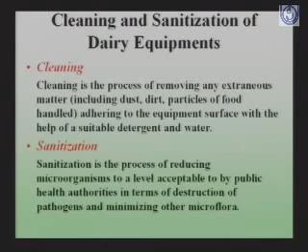Sanitization, on the other hand, is the process of reducing the microorganisms to a level which is acceptable to the public health authorities, in terms of destruction of pathogens and minimizing the other microflora which is there on the surface of the equipment.

First we will be discussing the detergents which are used for cleaning the equipment, and then we will be discussing the sanitizers. So first, the selection of detergents. For proper cleaning of the equipment, the detergent should be of appropriate type. It should not be irritating to the person who is cleaning the equipment. At the same time, it should not be corrosive to the surface of the equipment which is being cleaned.

So for an appropriate type of detergent, there are certain criteria which should be followed. First is the type of soil present on the surface of the equipment. Number 2 is the manner in which the soil is formed, whether it has been formed by processing the milk or whether the milk has been heated, and if heated, at what temperature, what was the pH. All these things will decide the manner in which the soil is formed.

The third criterion is the chemical composition of the water supply, what type of water is being used for the processing and for the cleaning of the equipment. Fourth is the nature of the food being processed or the food processing steps, whether you are processing liquid milk or manufacturing a product. So all depends on the nature of processing steps.

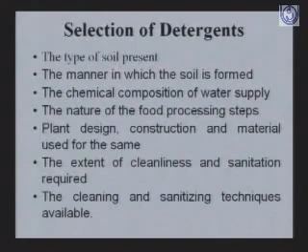Then plant design, construction and the material used for the same. If tin material is there, a different type of detergent will be required. If it is aluminium, then a different type of detergent will be needed. Then the extent of cleanliness and sanitation which is required. Then the cleaning and sanitizing techniques which are available in the plant. So these are some of the criteria.

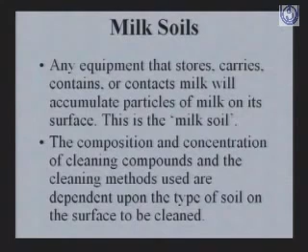Before discussing the detergents, it is important to know what milk soil is. Any equipment that stores, carries, contains or contacts milk will accumulate particles of milk on its surface. This is called milk soil. The composition and concentration of cleaning compounds and the cleaning methods used depend on the type of soil on the surface to be cleaned.

Then the chemical composition of typical milk soil. Just for example, the constituents are given: the cold milk soil, what type of composition it has got; hot milk soil, whether from a scraped surface heater or a tubular heater; and then the milk stones.

In the case of cold milk soil, the concentration of lactose is about 38% in the soil, fat is about 30%, protein about 26 or 27%, and the ash content is about 5%, or 5.3 exactly. In hot milk soil, lactose is only in traces. On the other hand, there is more fat, about 48 or 50%, and protein, about 40 or 41%, and the ash content is also higher, about 12%. This is in the scraped surface heater.

If the milk is being heated by a tubular heater, then the lactose will be in traces, the fat will be about 22 to 23%, protein about 30%, but the major proportion will be minerals, indicated by the ash content, which is about 46 to 47%.

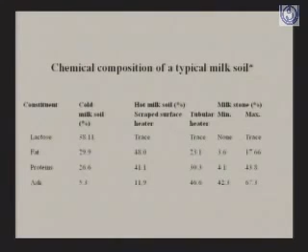Then the fat content is about 3.6% to about 18%. The protein content is about 4 to 43 or 44%. But ash content again is very high, which may range from 40 to 60 or 67 or 70%.

Then these components, how easily or how difficult they can be removed from the surface of the equipment. Sugar, which is soluble in water, is very easy to remove. The change induced by heating the soil surface is caramelization, and it is more difficult to clean when it becomes caramelized. Then in case of fat, it is water insoluble but soluble in alkali, and it is difficult to remove. Due to heating, there is polymerization, and this polymerized fat is more difficult to clean.

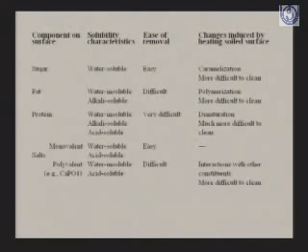Then protein is water insoluble, but soluble in alkali as well as in acid, very difficult to remove, and there is denaturation in the heated milk, much more difficult to clean the heated soil. Then the ash means the minerals. Monovalent minerals are water soluble, acid soluble, and easy to remove, but the polyvalent like calcium, magnesium, etc., form insoluble salts with phosphate, calcium phosphate or magnesium phosphate, and they are water insoluble but soluble in acid.

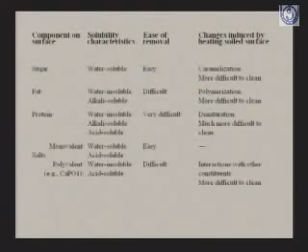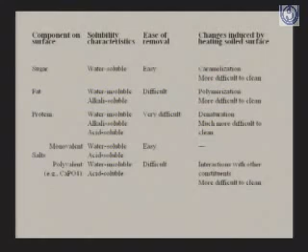They are difficult to remove, and during heating they interact with other constituents like protein, and it becomes more difficult to remove these stones which have been formed by the interaction of minerals with protein. Then the second important thing: one is the type of soil, second is quality of water. It affects the cleaning.

With the water, two problems may be there. One is the suspended matter. Water may not be pure, it may contain suspended matter. These must be kept to a minimum to avoid deposits on clean equipment surfaces, because water, instead of cleaning the surface, will accumulate these impurities on the surface of the equipment. So suspended matter or particles should be minimum or absent in the water used for cleaning. Second problem with water is its hardness.

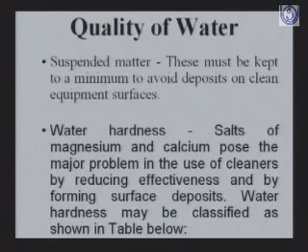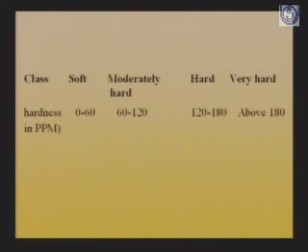The salts of magnesium and calcium pose the major problem in the use of cleaners by reducing effectiveness and by forming surface deposits. Water hardness may be classified as soft, moderately hard, hard, or very hard, depending on the concentration of these minerals. When the concentration of minerals is from 0 to 60 ppm, it is considered soft water. Between 60 to 120 ppm, the water is moderately hard. Between 120 to 180 ppm, water is hard, and above 180 ppm, water is very hard.

Then next comes the steps involved in the cleaning process. The first step is bringing the detergent solution into close contact with the soil to be removed by means of good wetting and penetrating properties. Second step is dislocating the solid and liquid soils from the surface to be cleaned by saponifying the fat, peptizing the protein, means hydrolyzing the protein, and dissolving the minerals.

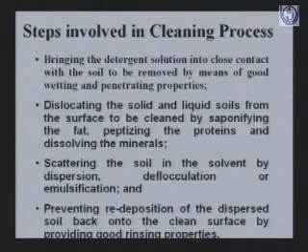Third step is scattering the soil in the solvent by dispersion, deflocculation or emulsification. And the next step is preventing redeposition of the dispersed soil back onto the clean surface. These are the functions of the detergent. In addition to these functions, the detergent should have other qualities. It should soften the water adequately so that the detergent remains effective. It must dissolve quickly and completely in water.

Be non-corrosive to the equipment being cleaned. Be non-toxic to the persons involved in cleaning. It should be economical, not very costly. Remain stable upon storage for a long period of time. Be non-caking and non-dusting. Function of a detergent: deflocculation, means it breaks the soil which is adhering to the surface of the equipment. Then it must dissolve the soil after breaking it.

Then it should emulsify the suspended fat and peptize or hydrolyze the protein. It should have rinsing power. Also it should saponify the fat into soaps so that it can be removed easily. Then it should have sequestering properties, means the minerals which are adhering should get removed. And it should have wetting properties. It should wet the surface easily.

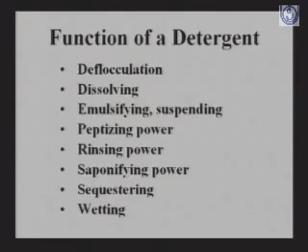Then classification of cleaning compounds and their major functions. Cleaning compounds can be classified into several classes depending on which type of chemicals they are. These classes include the alkalis, and their function is soil displacement by emulsifying, saponifying and peptizing. Then polyphosphates are used.

Their function is soil displacement by emulsifying and peptizing, then soil dispersion in the water by softening the water, and prevention of soil redeposition. Then there are surfactants, which are used to remove the soil from the surface of the equipment by surface active properties.

Surfactants have two types of groups, the hydrophilic group and the hydrophobic group. The hydrophobic group will be attracted towards the fatty material and the hydrophilic group will be attracted towards water. And by doing so, it will remove the soil from the surface.

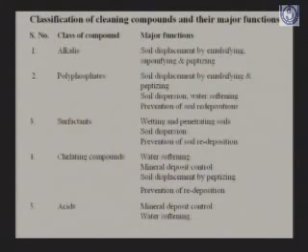Then it should have chelating compounds. Chelating compounds will do water softening and they will control the mineral deposits on the surface of the equipment. They will help in the displacement by peptizing the proteins and by prevention of redeposition of the removed soil. Then the next class is acid cleaners. Their function is to control the mineral deposits and soften the water.

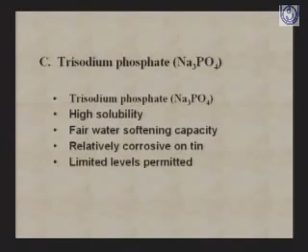Then trisodium phosphate. It has got high solubility, fair water softening capacity, and is relatively corrosive on tin. Limited levels are permitted, because in the wastewater the level of phosphorus should not be very high, so only limited levels are permitted as a detergent.

The next category is sodium metasilicate. It has high active alkalinity and excellent deflocculating and emulsifying properties, and is relatively non-corrosive despite strong alkalinity; it protects metals from other corroding alkalis. It has good suspending abilities, very effective in holding the soil in suspension during washing, so complete cleaning is possible. It is only a fair water softener, because calcium and magnesium silicate are formed in hard water.

When water is hard, sodium silicate will interact with calcium and magnesium, calcium silicate will be formed, and because of that the water will not be softened. Then the other category is modified sodas. These are mixtures of soda ash, sodium carbonate and bicarbonate. They are useful for manual washing operations as they do not cause skin irritation, for hand washing of bottles, cans, etc.

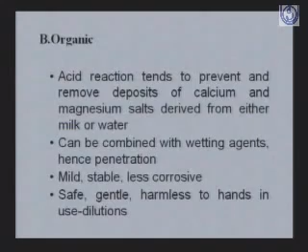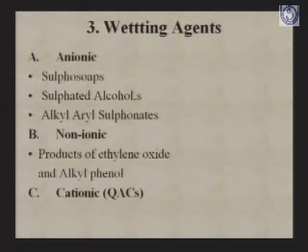These wetting agents are very important because they help in wetting the surface of the equipment, and by wetting the surface the soils can be removed by the detergent very easily.

Then the next category is the sequestering agent. These are chemicals which will interact with calcium, magnesium, etc., and as a result they act as a chelating agent. They interact with calcium, magnesium, etc., and help in softening the water and also removing the soil from the surface of the equipment.

EDTA is in this category. First, it is heat stable, compatible with quaternary ammonium compounds, and it can be added to that. Then it has got bacteriostatic property and it prevents redeposition of the soils.

Second category of the sequestering agent is sodium salt of gluconic and heptonic acid. They are stronger than EDTA in chelating calcium and magnesium, but they require high concentration of NaOH for their effectiveness.

Then the third category is polyphosphate, sodium tripolyphosphate or sodium pyrophosphate. They are unstable to heat and only limited levels are permitted, again because in the wastewater their concentration should be kept minimum.

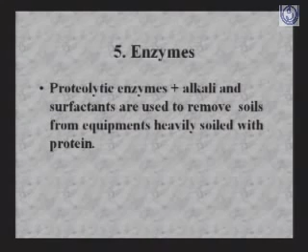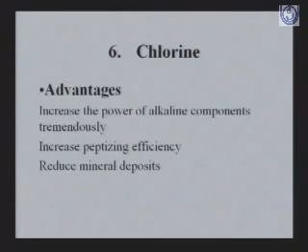Then the next category is chlorine. The advantage is that it increases the power of the alkaline components tremendously, increasing the efficiency to clean the equipment and the peptizing efficiency. It also reduces mineral deposits on the surface of the equipment.

Then the last categories are the inhibitors and anti-foaming agents. Sodium sulfite is used as an inhibitor for the tin surface, and sodium silicate is used for the aluminum surface.

As far as these detergents are concerned, no single detergent can fulfill all the functions. Hence you have to use more than one, two, three substances. Only then will you get good cleaning efficiency from these detergents.

Then the second category is the sanitizers. Sanitizers can be divided into three categories: the thermal sanitizers, which include steam and hot water.

Generally steam is not used because it is more expensive compared to hot water or any other chemical sanitizer, so it is more costly. It is also very difficult to control the temperature and contact time, and because of the condensation product there is a problem of removing that product. So because of all these limitations, steam is generally not used as a sanitizer.

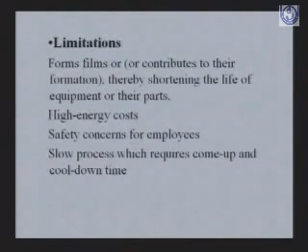Then the limitations of hot water are: it forms film or contributes to its formation, thereby shortening the life of equipment or their parts. Then there's high energy cost, and safety concern for employees because it is very hot water, so it may cause problems for employees involved in cleaning and sanitization. Then it is a slow process because coming up to temperature and cooling down needs some time. So these are the limitations of hot water.

Then the second category is radiation. By UV or cathode rays or gamma rays we can sanitize the equipment. Generally it is not used for equipment; it is used for some specific purpose, for example to sanitize the packaging material.

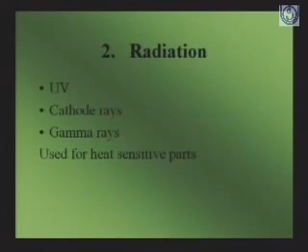Then the third category of sanitizers, which are more common in use in the dairy plant, are the chemical sanitizers. They are approved for food contact surface applications.

They are inexpensive compared to other sanitizers, low in toxicity and corrosiveness, readily solubilized and possess some detergency also in addition to sanitization, stable under all types of conditions, tolerant of a broad range of environmental conditions, destroy microorganisms rapidly, and have a wide range of scope of activity.

In this first category is chlorine and its compounds, acting on microbial membranes. How do they kill the microorganisms? They kill the microorganisms by acting on microbial membranes, having a lethal effect on DNA of the microbes, inhibiting the cellular enzymes involved in glucose metabolism in the microorganism.

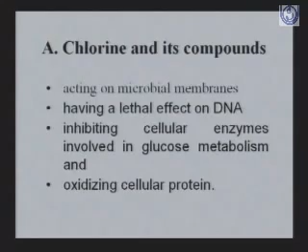They oxidize the cellular proteins of the microorganism. This type of chlorine is very irritating, very corrosive to the equipment, but it has got some water softening capacity. Then second category is iodine and its derivatives like iodophores.

They kill the microorganisms by cell wall damage, destruction of microbial enzyme activity, and direct halogenation of proteins of the microorganisms. The problem with iodophores is that they are harmful for the persons involved in sanitization, but they have better water softening capacity compared to the chlorine compounds.

Then third category is quaternary ammonium compounds. Their advantages are that they are non-irritant, they are very effective antimicrobial agents, they also act as a surfactant, they remove the microorganisms by removing the soils from the surface.

They are active and stable over a wide range of temperature, more active at alkaline pH compared to acidic or neutral pH. They leave a residual antimicrobial film on the surface of the equipment, which is good, but sometimes is not desirable. In the manufacturing of cultured products, if that film remains on the equipment, it will have an adverse effect on the production of these cultured products.

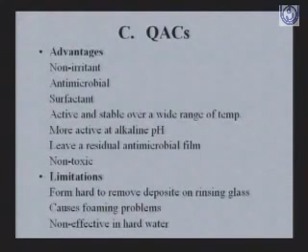These are non-toxic. Limitations are they form hard soil deposits, difficult to remove on rinsing, cause foaming problems, and they are not effective in hard water.

Then fourth category is acid anionic sanitizers. Their advantages are that they are useful at low pH, have detergency property, good stability, low odor potential, non-corrosive to the equipment, non-harmful to the employees involved. Then limitations: high cost.

Then narrow pH range, 3 to 5 pH, they are effective only in that range. Low activity on molds and yeast. Excessive foaming in CIP, so they are not suitable for in-place cleaning because of the excessive foaming. Then their incompatibility with cationic surfactants and detergents.

Then fatty acid sanitizers. These are formed by fatty acids, and then some other acid like phosphoric acid is added to the fatty acid, so they are a mixture of fatty acids and inorganic acids. Their advantage is that they have lower foaming potential, so they can be used in CIP systems. Broad range of activity is there.

They are effective against so many microbes. Highly stable in dilute solutions. The limitations are non-effective above pH 3.4 to 5, non-effective against mold and yeast, unstable below 10 degrees centigrade if they are stored at that temperature.

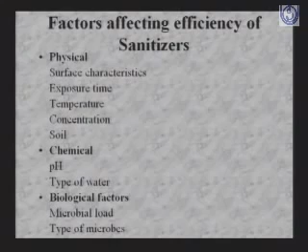Then type of soil, and the chemical factors are pH of the solution, type of water, whether it is hard water or soft water. Biological factors are microbial load and type of microbes. Then cleaning method, what methods are used for cleaning the equipment.

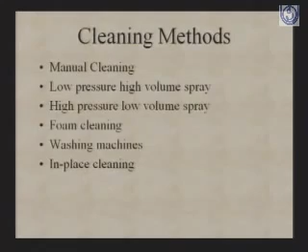These are either manual cleaning, which may be at low pressure with high volume of spray, or at high pressure with low volume of spray. It may be foam cleaning, it may be by washing machine, or it may be in-place cleaning or CIP cleaning. Then assessment of cleaning and sanitization efficiency.

How can you assess the effectiveness of the detergents and sanitizers used on the equipment? This you can do either by visual inspection. If you feel that the surface is not clean, it will show the difference. If the equipment is very clean, then visually you can judge whether it is clean or not.

If you put some water on the surface of the equipment, the water will flow when the inclined or vertical surface is there. Water will flow down and it will flow in a straight line if the equipment is very clean. But if it is not clean, then there will be breaking in the line.

Then you can do a pH test. If you have used detergent, its pH is more than 7. So if you just rinse the equipment and check the pH of the solution, and it is more than 7, then some detergent or sanitizer is remaining on the surface of the equipment and has not been removed properly.

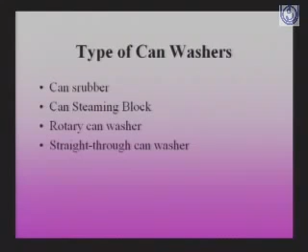Then we have cans. Cans are used to take the milk from one place to another place, so generally can washers are used in a dairy plant. In short, I will discuss what type of can washers are there: can scrubber, can steaming block, rotary can washer, and straight-through can washer.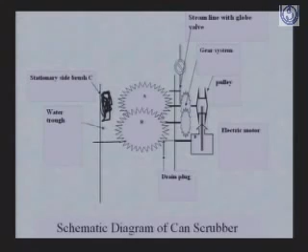Now detergent solution is supplied with the help of an electric motor. With the help of the electric motor, brush A will rotate inside the inverted can, and brush B will also rotate, but brush C is static. These brushes will clean the can from outside. So with the help of these 3 brushes, detergent solution, and water, the cans can be cleaned from inside as well as from outside.

Then the steaming block is there. Here the can is inverted, and with the help of spray nozzles, the steam, water and detergents are supplied to the base of this steaming block, and the cans are washed.

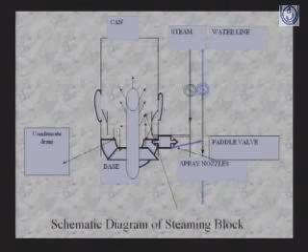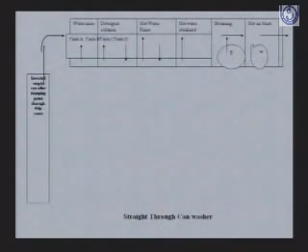Then it is a straight through can washer, in which the inverted cans are kept, and then the detergent solution is applied. They are washed first with water, then detergent solution, then with hot water and with steam, etc.

Then CIP system, in-place cleaning. In this system, the bigger equipment in the dairy plant are cleaned and sanitized by this process. You need not dismantle the equipment. In-place cleaning means with the help of pipes, the water, hot water, detergents, steam, etc. can be circulated in the system and it will be cleaned and sanitized.